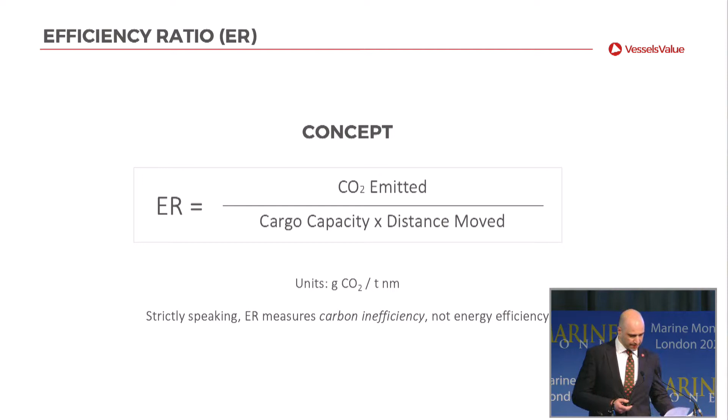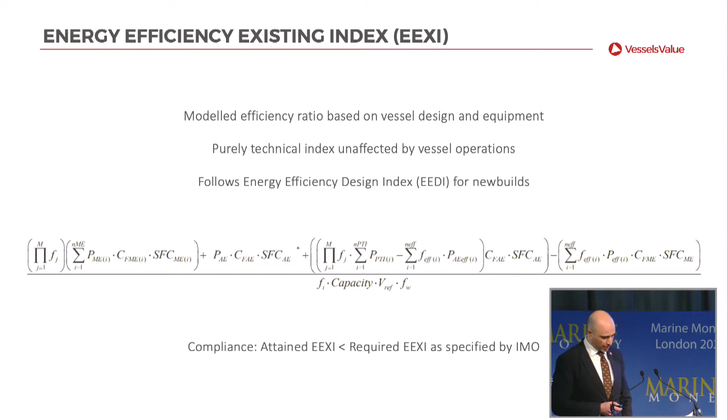Moving on to the Carbon Intensity Indicator, this is an actual efficiency ratio, based on the fuel consumed and the transportation work done. It's computed annually from vessel data submitted to the IMO's data collection system, or DCS. And because it measures real emissions, it will depend on both a vessel's design and its operations.

And compliance is being enforced by banding CII from A, which is the least emitting, to E, which is the most emitting, and then enforcing incentives and penalties. So just to recap, we've got the EEXI and EEDI, which are models, and then we have the CII, which is reality, if you like.

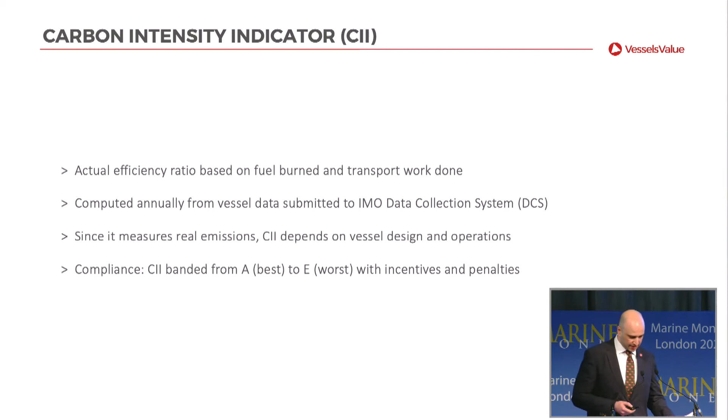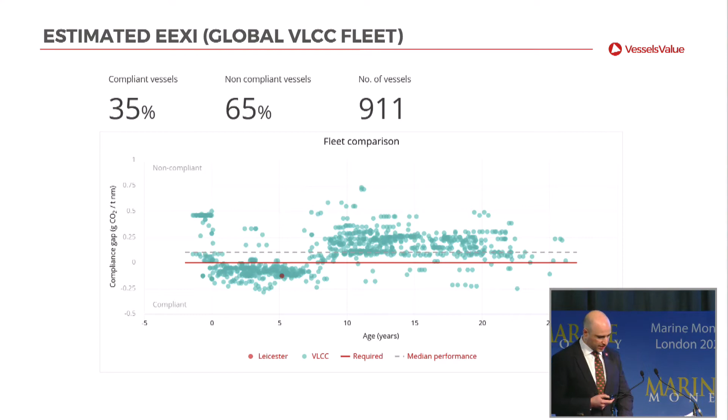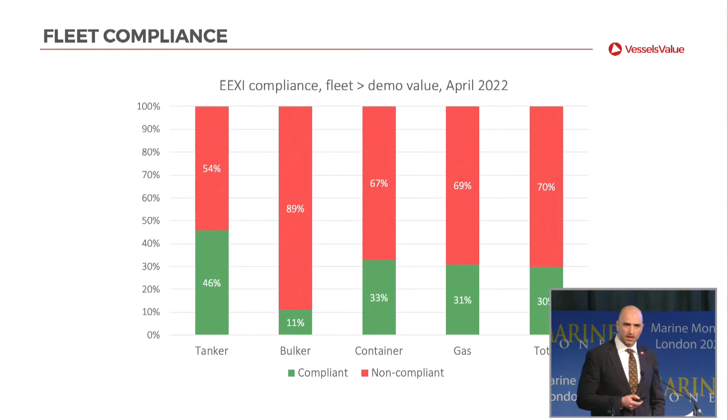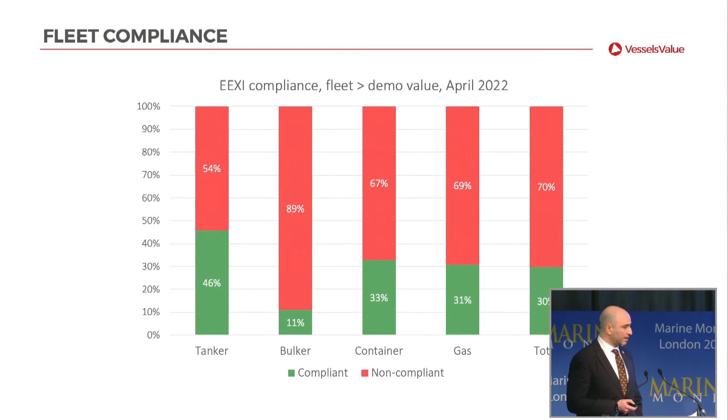We've done an analysis of EEXI compliance for the 4 major sectors. That's tankers, bulkers, containers, and gas ships. Now, this is for larger vessels, essentially over 20,000 deadweight. And what we find, I think, is quite interesting and is consistent with some of the reports that we've seen in the media. There isn't a single one of these 4 major sectors that has the majority of its larger vessels in compliance. And particularly worrying, I think, is the bulker sector, where we're estimating almost 90% of vessels failing to comply at the moment. So more work needs to be done to meet this metric.

And what sort of work might that be? Well, for marginally non-compliant vessels, owners may look at retrofitting of energy-saving devices, and I think we're going to hear about that in the next talk from Newport Shipping. If the compliance gap is greater, then owners may need to look at engine power limitation, in other words, derating their engines. This clearly will have an impact on the maximum steaming speed of the vessel, so there may be commercial implications for doing that.

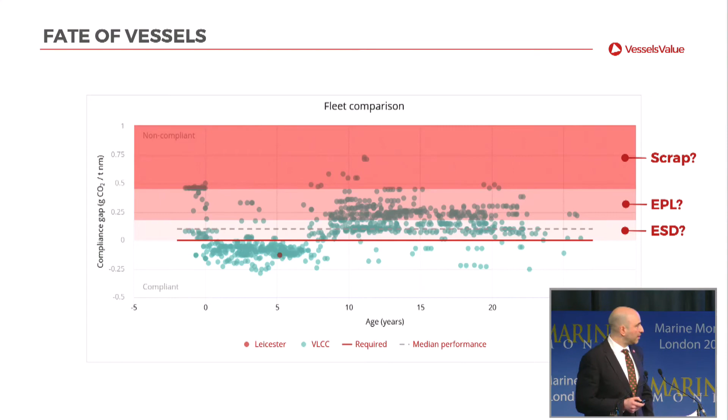And then for the vessels which are grossly non-compliant, it may be that the engine power limitation required to return to compliance will be too great, and these vessels may be candidates for scrapping, which we've heard about earlier today. So that is compliance with the technical indices. Now, are the technical indices useful? Well, they would be if they predict actual CO2 emissions. So that's the next question I want to look at.

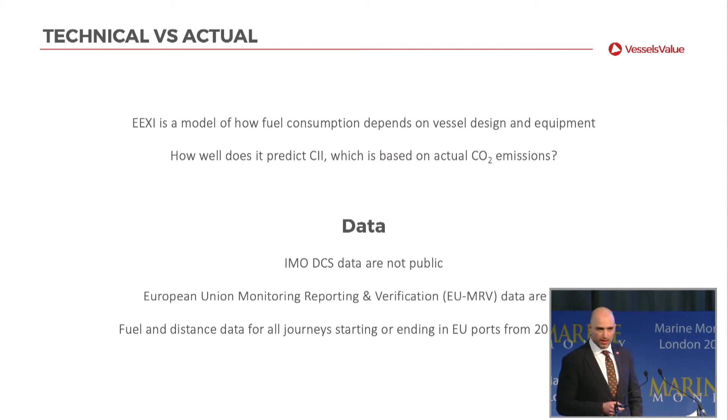As I said, EEXI is a model of how fuel consumption depends on vessel design and equipment. How well does it predict CII, which is based on actual CO2 emissions? So to answer this question, we had to get some data. Now, the IMO DCS data are not public. As an aside, in my opinion, I don't think that's good enough. I think they should be, but they're not. But fortunately, the European Union's Monitoring, Reporting and Verification, or EU-MRV data, are public, and these give fuel and distance data for all journeys involving a member state port. And we took the data from 2018 to 2020.

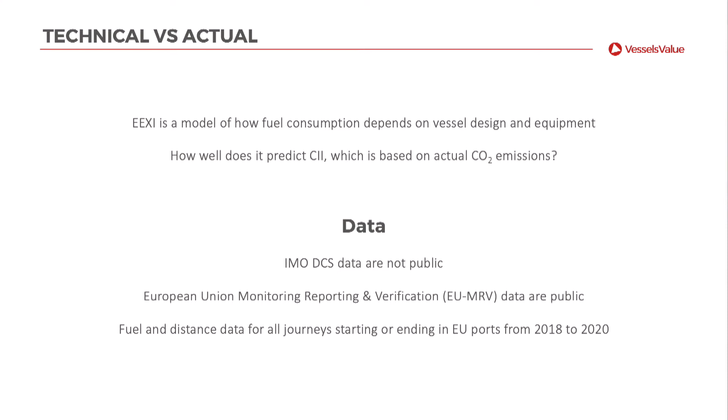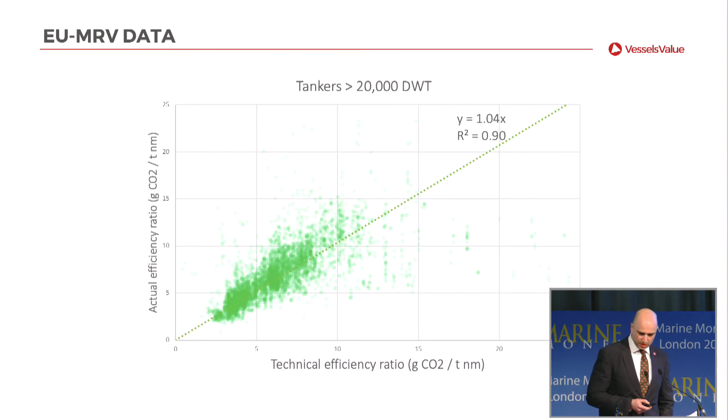And what we did is we plotted on the horizontal axis here the technical efficiency ratio, in other words, the EEXI or EEDI of the vessel, and then on the vertical axis, the actual efficiency ratio, in other words, the CII. And for the technical measure to be a good predictor of the actual measure, we want to see a straight line with a gradient of 1 here. And in fact, for tankers, this is pretty good. We get a gradient, on a least squares best fit, of 1.04, and for bulkers, also a gradient close to 1. But you can see that although the trend is pretty good, there is a lot of variation in the data.

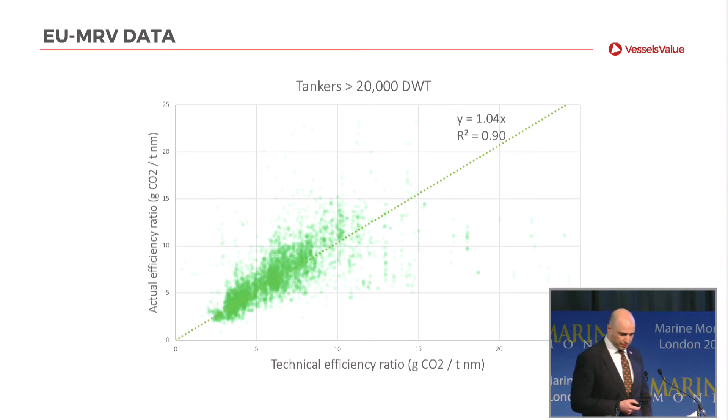So looking at predictive accuracy, we measure the percentage predictive error, which is the actual CII minus the model EEXI, and we get a predictive error of plus 4% for tankers, minus 3% for bulkers, but the standard deviations are very large. So what that's saying is that the good news is that EEXI is, in aggregate, a good predictor of actual CO2 emissions.

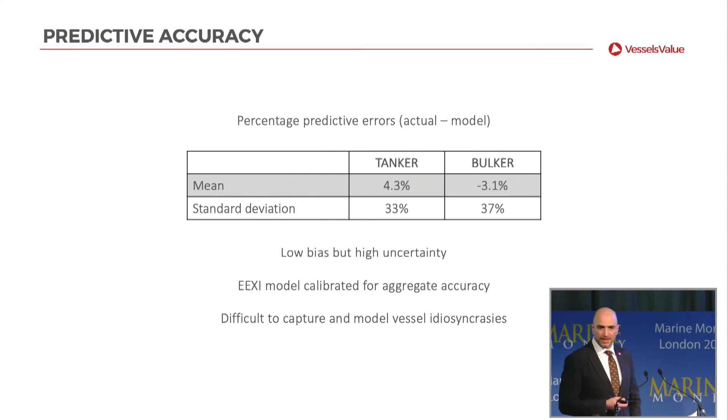The model is well calibrated for accuracy across the fleet, but there is high variation, and I suspect that is because it's difficult to capture and model all of the idiosyncrasies of the vessels that are out there. In particular, if you were an owner of a vessel that was sitting in one of the off-diagonal regions, so if you were at the top left of this chart, that suggests that you have a low technical index but high actual emissions. That means you could be passing EEXI but failing CII.

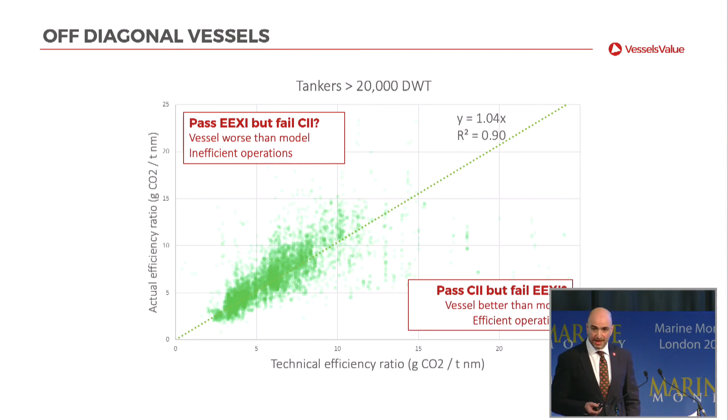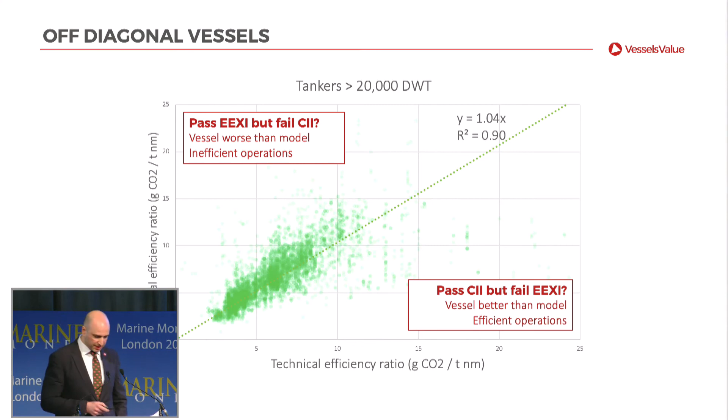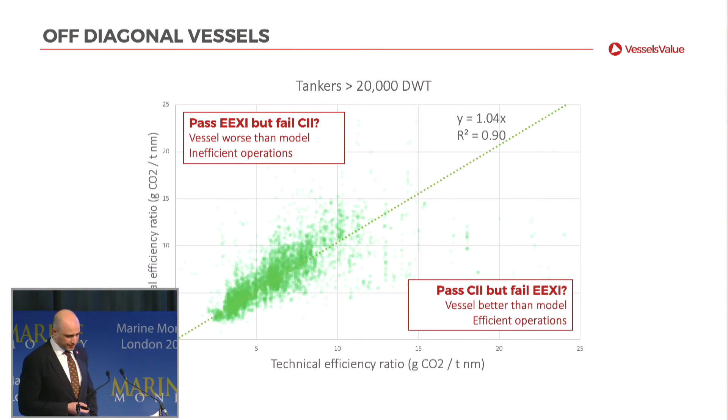One way of putting that is saying that either your vessel is worse than the EEXI model is suggesting, or you had particularly inefficient operations. If you're in the bottom right of this chart, you're passing CII but failing EEXI, which could mean that your vessel is actually cleaner than is modeled by the EEXI formula, or that you had particularly efficient operations in that year. And on the question of operations, we now look at the final question of my talk, which is what sort of operational CO2 savings might be possible.

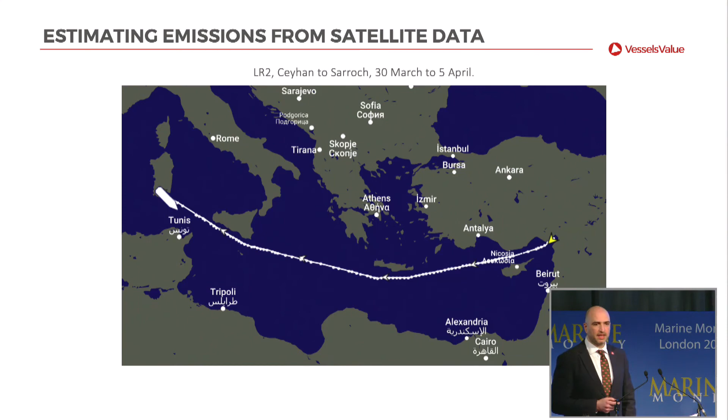And this is a very cool little study that we did where we are estimating CO2 emissions from satellite data. So here we show a recent voyage of an LR2 tanker from Ceyhan to Sarroch, and each little dot on this picture is a satellite report, so location and time of the vessel. And we can estimate from these satellite data the CO2 that the vessel is emitting.

So we have the location data, which gives us distances and times. We convert those into speeds. We then use the speed plus the data that we have about the engine on board the vessel to estimate power and therefore fuel consumption, and that then gives us the CO2 that was emitted on that voyage, or an estimate of it. Now we can then run a hypothetical simulation of this voyage.

Actual journeys occur at variable speeds, and actually you can see quite high variability in speed on a real journey. The question I wanted to ask was how much CO2 would be emitted for the same journey, in other words, same distance, same duration, same cargo, if the vessel had traveled at the equivalent constant speed. So put another way, without changing trade at all, how much CO2 can we save through one simple operational change, which is going at a stable speed?

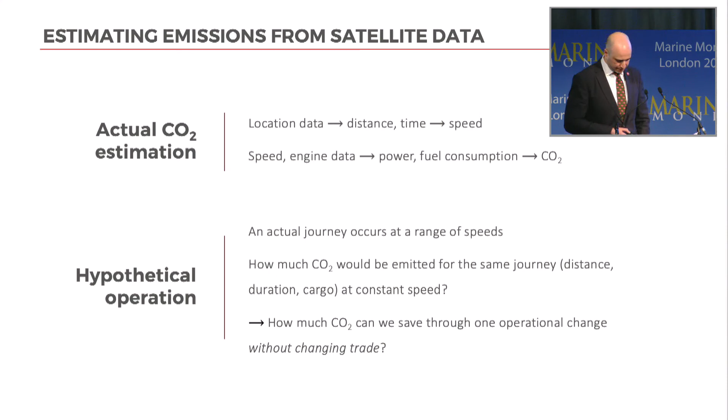So we ran this, and this was for the whole of the LR2 fleet. I think that was 333 vessels between 2018 and 2020, and we looked at the percentage of the CO2 emissions that were saved under the hypothetical that the vessel had traveled at constant speed compared to what it had actually traveled at. And what we see here is the distribution of those CO2 savings, which are sort of distributed around the 4% level. So the total CO2 saved was almost 1 million tons, and that was 3.8% of the total estimated emissions.

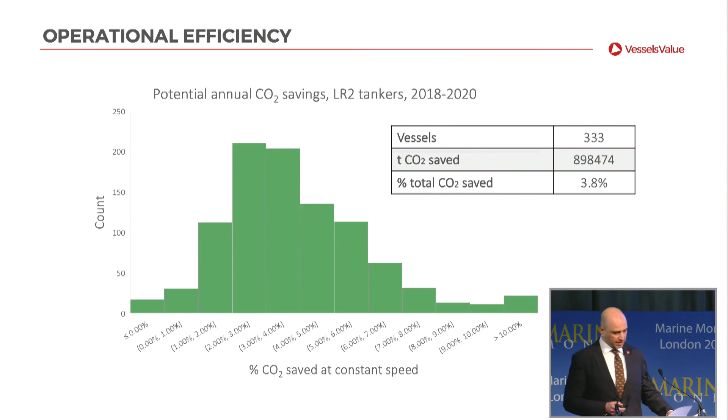And I think the point I want to make here is that there is scope. This is without changing trade, this is without addressing port congestion, idle time, it's without fleet optimization. This is simply doing all of the work that we did in those years and just doing it at constant speed, and you get almost 4% saving. So there is scope for saving CO2 through operations.

Final thoughts. I think undoubtedly greenhouse gas reductions are going to be driven by technological and operational changes, I suspect mostly technological, over the coming decades. I think what I wanted to present here was that data and analytics can help the industry monitor and prioritize where it spends its resources on tackling this problem.

And finally, I think it's important to not be over-reliant on metrics. There's a phrase I once heard, measure what you value because you will value what you measure. If we want to reduce emissions, it's fine to look at efficiency ratios, but we have also got to consider that they don't measure emissions directly. And if we want to measure emissions, we have to look at the whole piece. So that concludes my talk.